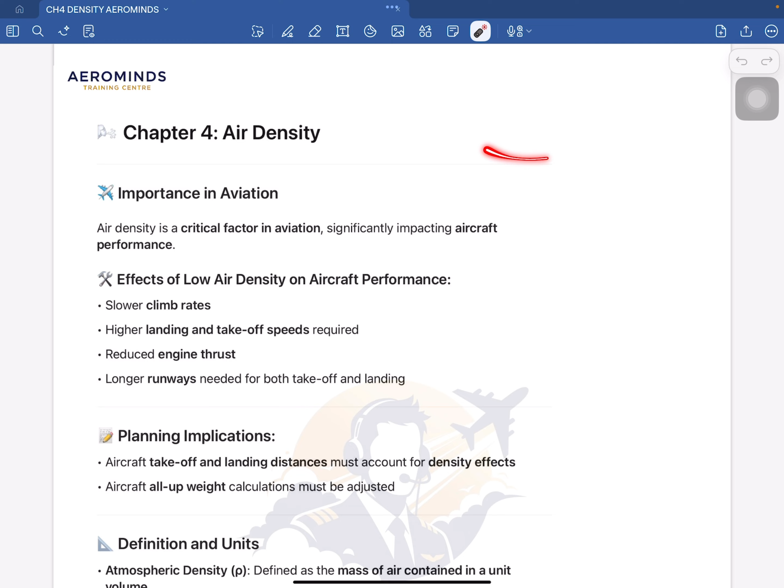Now let us slowly understand the effects of low density air on aircraft performance. First is slower climb rates. Density is denoted by rho. If the air density is low, the air molecules will be less. The wing will produce less lift at the same speed, and the engines produce less thrust because they are breathing less oxygen.

So when the aircraft tries to climb, it feels heavy and somewhat lazy. The climb angle of the aircraft will reduce, and even if you pull the nose up, the aircraft will not climb very well. In exam, remember this logic: lower the density means poorer the climb rate.

Now the second effect is higher landing and takeoff speeds required. This is extremely important because lift depends upon air density, and if the density is low, the wing must move faster through the air to generate the same amount of lift. That means higher TAS will be required for takeoff - TAS is true air speed.

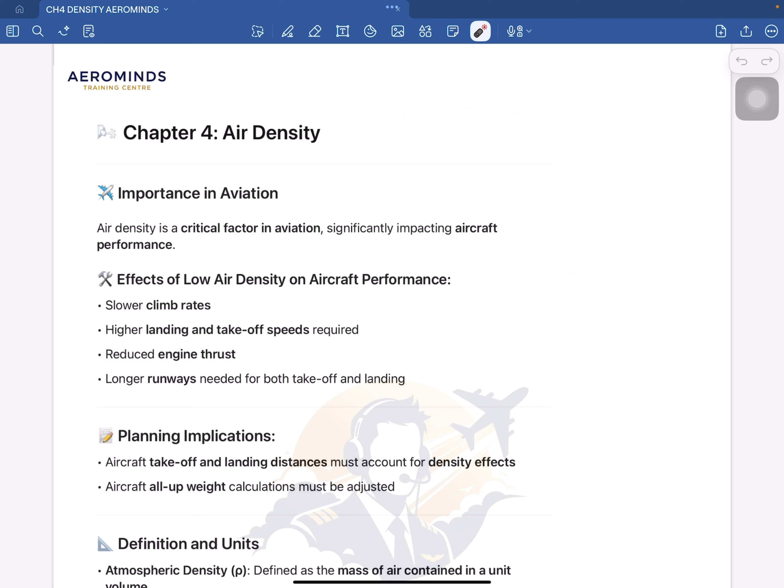So higher TAS will be required for the takeoff roll. Then on landing also, you must approach at a higher speed. Suppose your approach speed is 100, you have to approach at 110 knots. So low density means higher speeds. In DGCA questions, they may ask you indirectly what happens to the takeoff speed when the density reduces - the answer is the takeoff speed increases.

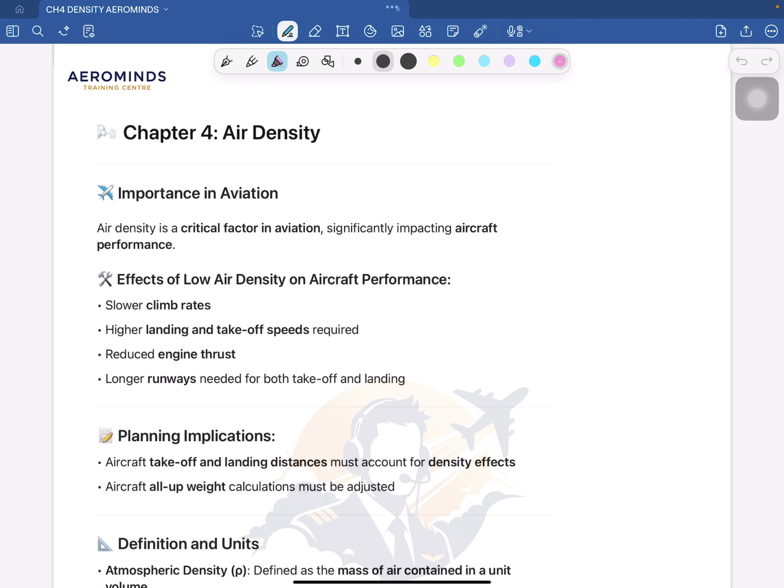Remember this: air density is a critical factor in aviation, significantly impacting aircraft performance. Now, effects of low air density on aircraft performance - first is the slower climb rate, which I told you, the aircraft will not climb much and it will feel lazy. Second is higher landing and takeoff speeds required, and why is it required if someone asks you - because for the same amount of lift, you have to increase your speed. So that is the answer.

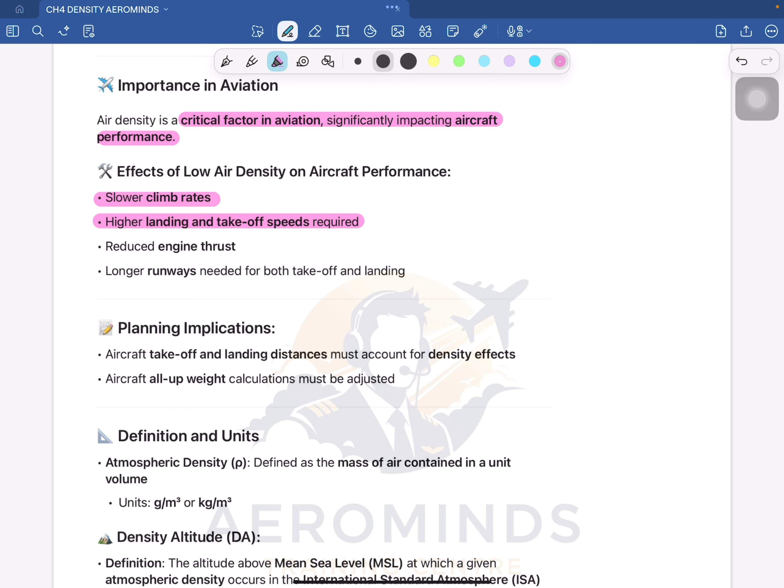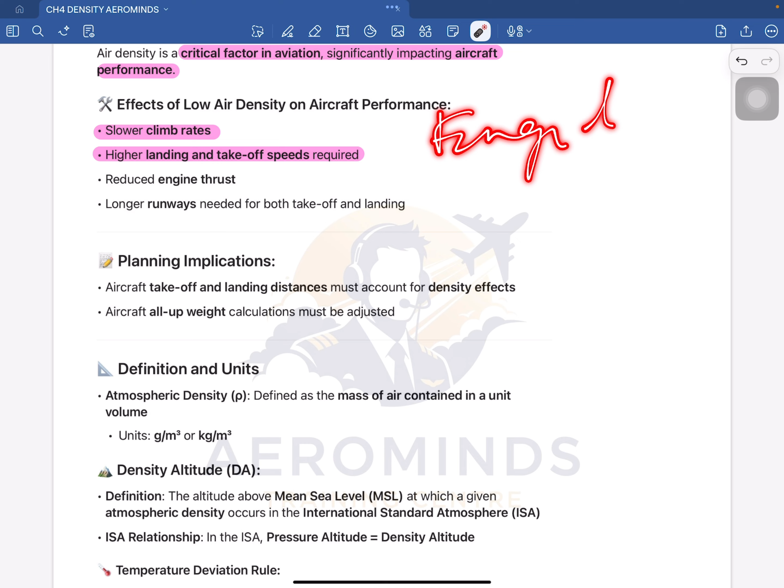Then comes the third one, which is reducing the engine thrust. Now, engines are basically like lungs, they are breathing the air inside. When air density is low, oxygen content per unit volume reduces. Less oxygen means less combustion, and less combustion means less power. This applies to piston engines as well as jet engines, so the engine cannot give its full rated power.

That is so now this is why hot and high airports are performance critical. So we'll see reduced engine thrust. Now, next is longer runways are needed for both takeoff and landing.

Now, why is it so? Combining everything we just discussed, higher speeds are required. Acceleration is slower because thrust is reduced. Because of this, the climb rate will be poor and the stopping distance will increase because your speed was also increased. Now, if the runway is short and density is low, you are basically inviting danger to yourself.

So this is why performance calculations are very mandatory before every flight. Now, before moving to planning implications, we'll mark this quickly: longer runways are needed. Now, if anyone asks you why, so you have the answer - because at low density, at higher airports, engine thrust will be less produced, the climb rate will be less, and landing speed will be more. So you're basically inviting danger.

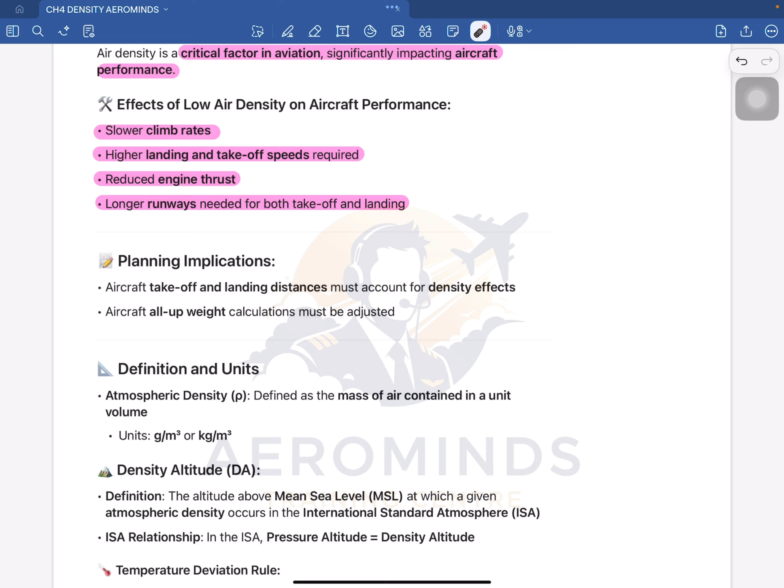Now comes the planning implication. This is where the actual theory meets your actual flying. Aircraft takeoff and landing distance must account for the density effects. You cannot assume the sea level performance at a high hill station, or in summer afternoons with high temperatures. The performance chart already assumes a certain density condition.

Now, as a pilot, you must calculate the density altitude and then check whether the runway length is sufficient or not. Suppose your density altitude is 10,000 feet, and at this, the runway length required for your landing is 2,000 meters, but the runway is only 1,500 meters, so you cannot land at this runway.

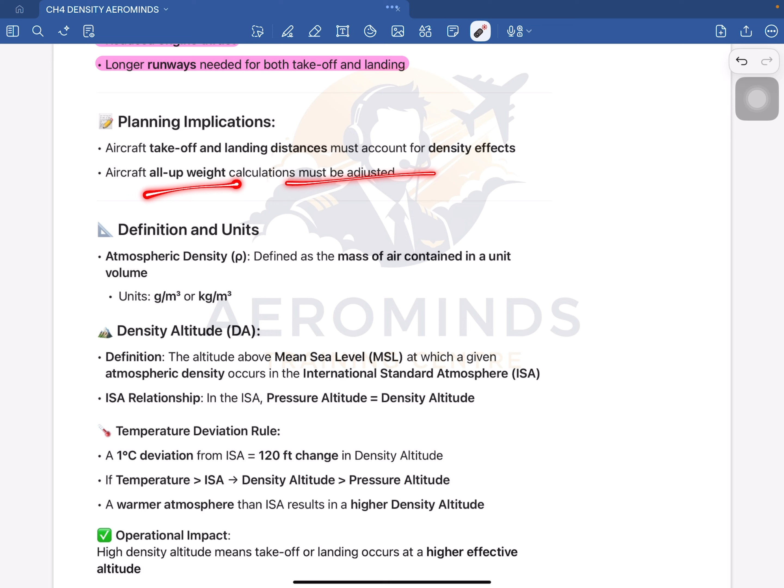Okay, so now next is all up weight calculations must be adjusted. Now if the density is low, you cannot carry full weight. You may need to offload some of the passengers or some of the fuel, or the cargo. This is very common in commercial operations. Weight that is safe in winter mornings may be unsafe in the summer afternoons, you can take it like that. Now DGCA loves asking these questions, which are connecting to the density altitude and the maximum takeoff weight.

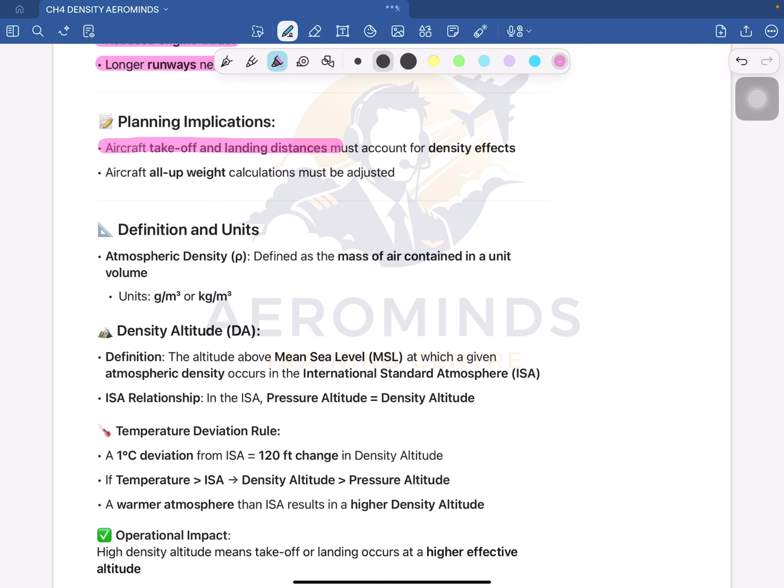So remember this: aircraft takeoff and landing distance must account for density effects. Then aircraft all up weight calculation must be adjusted, it should not exceed. Then comes your definitions and units.

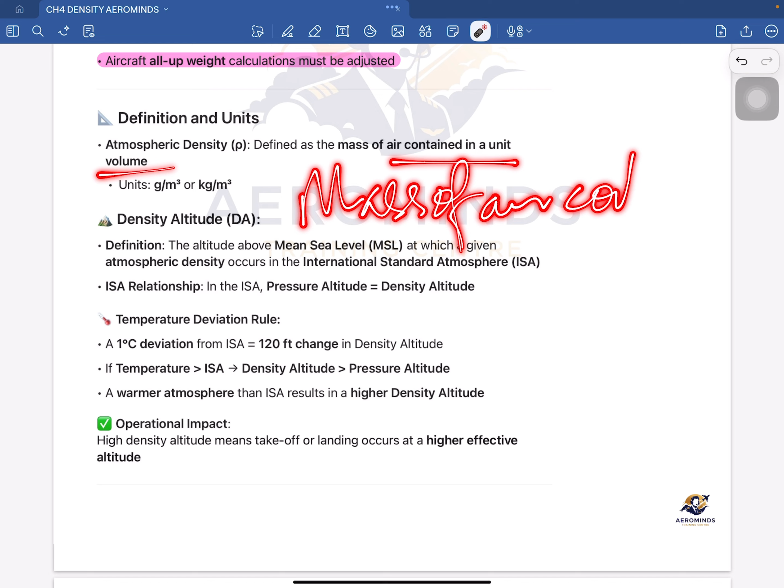So atmospheric density is denoted by the symbol rho, as I told you. It is defined as atmospheric density is the mass of air contained in a unit volume. Remember this.

A very simple meaning of this is how much air weight is present inside a given space. Suppose you have a tiffin box and you have air inside it, not food - how much air is present in that will give you your density of that tiffin. Now, more mass in the same volume means higher density, less mass means lower density. Now the units are gram per meter cube or kilogram per cubic meter. In aviation, we usually use kilograms per cubic meter.

So atmospheric density is defined as rho, denoted as rho, and defined as the mass of air contained in unit volume, and the units are gram per cubic meter or kilogram per cubic meter.

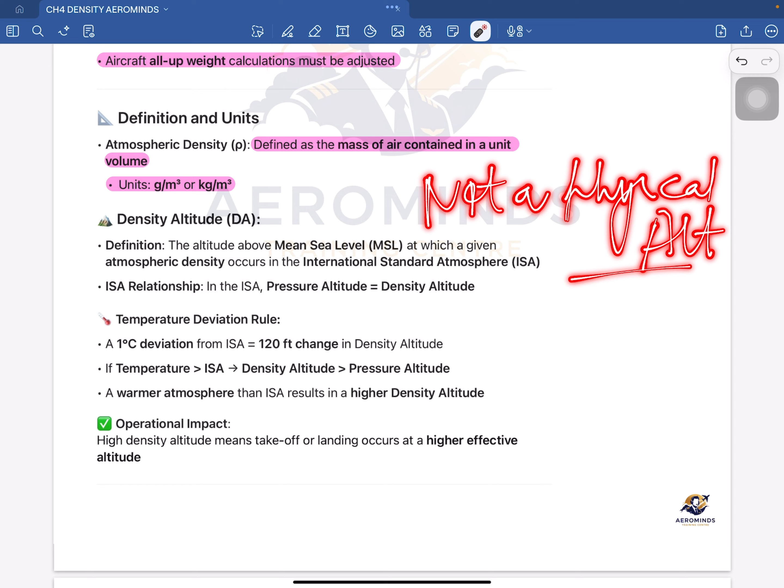Now comes the very important term, which is density altitude. Listen to this carefully. Density altitude is not actually a physical altitude, it is just a performance altitude. Remember this, it is not a physical altitude, it is a performance altitude. Very important. Now, density altitude may be defined as the altitude above the mean sea level at which a given atmospheric density occurs in the international standard atmosphere.

Okay, now if I simplify this, density altitude answers one question: at what height in the ISA, International Standard Atmosphere, would I find the air with the same density as my current air? That is it. Now if you are standing at an airport, suppose at 2000 feet, but the air behaves like air at 5000 feet, then your density altitude will be 5000 feet.

Remember this. The altitude above mean sea level at which a given atmospheric density occurs in the International Standard Atmosphere. Suppose you're standing at 2000 and you feel the air is at 5000, so the density altitude will be 5000. Then comes the ISA relationship.

Aircraft performance cares about the density altitude and not your actual altitude. Suppose your aircraft is standing at an altitude of 1000 feet, but the air it is feeling will be like 6 or 7000 feet, so the density is reduced, and the aircraft performance will be degraded. That is why aircraft need to know what the density altitude is.

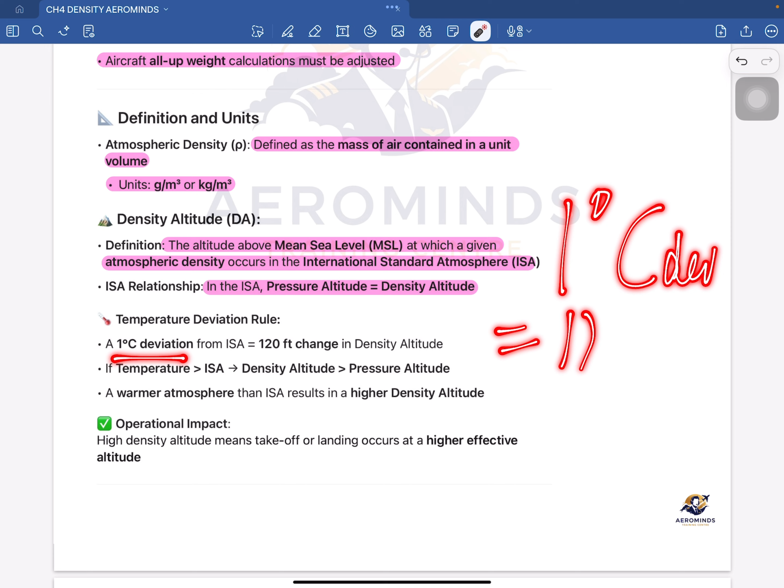Now comes a very favorite exam rule, the temperature deviation rule. A 1 degree Celsius deviation from ISA is equal to a 120 feet change in the density altitude. Remember this: 1 degree Celsius deviation equals 120 feet change in the density altitude. This is the thumb rule, not an exact equation, but DGCA heavily uses it.

Now, if the temperature is higher than ISA, what will happen? The density altitude becomes higher than the pressure altitude if the temperature is more. Why? Because the warmer air will expand. Warmer air expands and cold air contracts, as told in chapter 2, atmospheric pressure. So warm air expands and expanding air is less dense, and less dense air behaves like the air is at a higher altitude. Remember this golden logic: hot air equals high density altitude, and a warmer atmosphere than ISA results in a higher density altitude always, no matter what.

Now the operational impact: high density altitude means takeoff and landing occurs at a higher effective altitude. Even if your altimeter says 2000 feet, the aircraft will feel like it is at 6000 feet. The engines, the wings and propellers, everything behaves according to that 6000 feet. Remember all this.

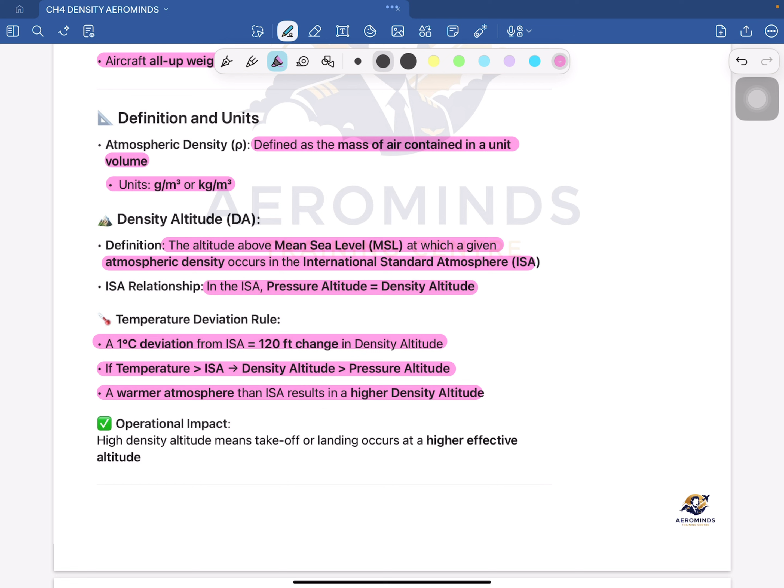The deviation is 1 degree Celsius from ISA equals a 120 feet change in the density altitude. If the temperature is more than ISA, the density altitude will be more than the pressure altitude. So temperature more, more expansion, and the density altitude will rise up. A warmer atmosphere than ISA results in a higher density altitude, same as before. Then comes the operational impact: high density altitude means takeoff and landing occurs at a higher effective altitude.

Now we are moving to density of dry air. PV equals RT. This is where the formula comes, but I'll explain it slowly. The density of dry air is actually calculated using a fundamental gas equation, which is PV equals RT.

Now P is the pressure, V is the volume, R is a constant, and T is the temperature, the absolute temperature. This equation applies to gases, including air.

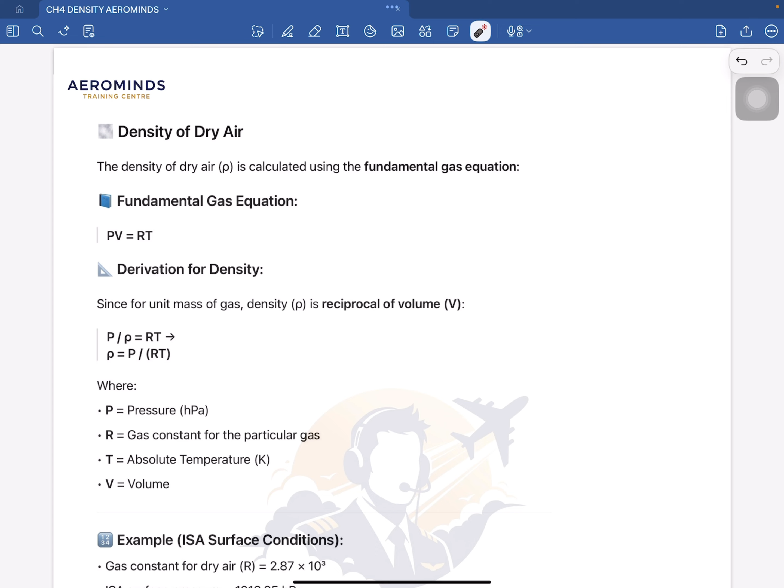Now the derivation for density is mass divided by volume. For unit mass, density becomes the reciprocal of volume. So if we rearrange the equation, P divided by rho equals RT, which gives rho equals P divided by RT. This is a very important exam result: density equals pressure divided by temperature. So if the pressure is increasing, the density is increasing. If the temperature is increasing, the density is decreasing.

Now this explains most of the aviation behavior. Okay, now let us understand the symbols clearly.

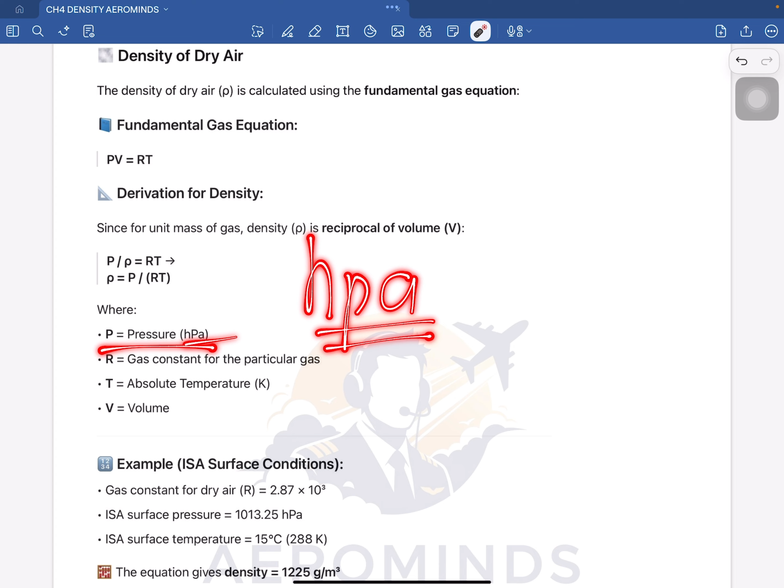So P is pressure and it is measured in hectopascals, HPA. Remember this. And mean sea level pressure is 1013.25 hectopascals. Go, this is it.

Then comes R, which is the gas constant for a particular gas. And for dry air, it will have a fixed value. Now, that is not more important. You just need to know, from the surface level.

Now comes T, which is absolute temperature. So absolute temperature is in Kelvin. K stands for Kelvin, and it is always in Kelvin. It is never in Celsius or Fahrenheit. And V is the volume, as we know.

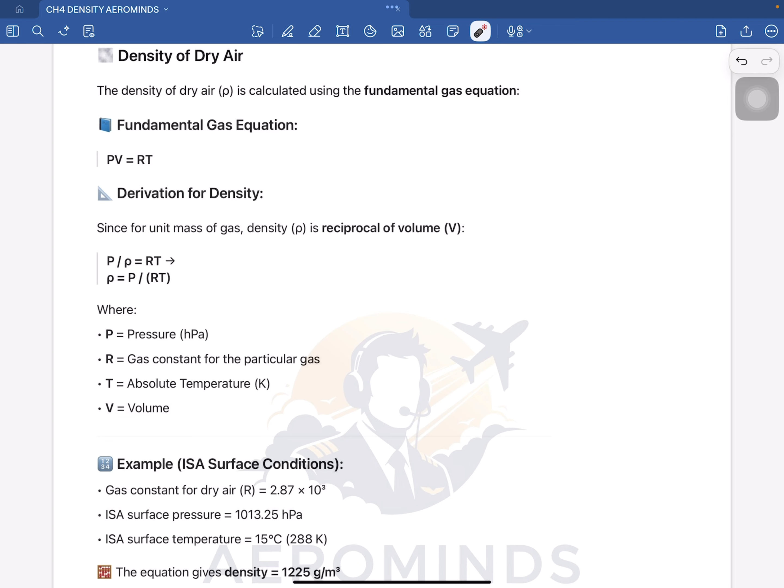Now, if we see an ISA surface condition example, the gas constant for dry air is given as 2.87 multiplied by 10 to the power 3. Now, ISA surface pressure is 1013.25 hectopascals, and ISA temperature is 15 degrees Celsius.

Now, if you want to calculate it, when you put these values into the equation, the density comes out to be 1.225 kilograms per meter cube. And if you want to convert it, that is 1225 grams per meter cube.

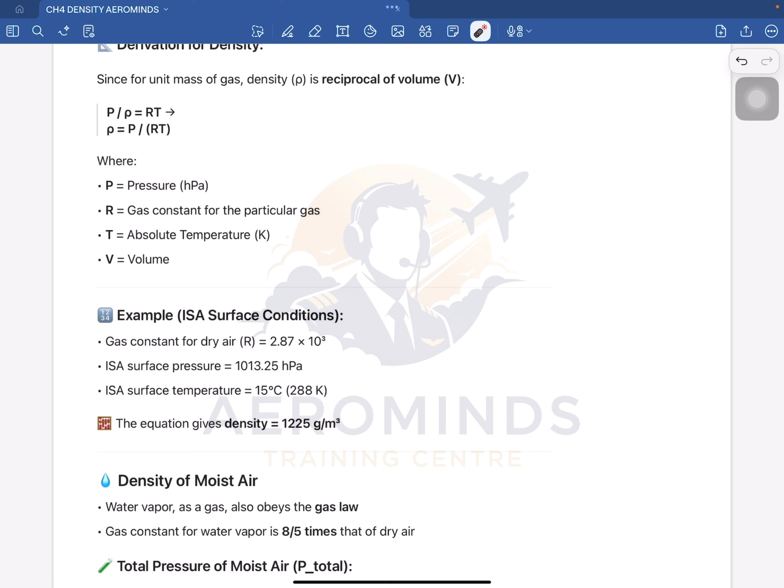Now this value is very important for your exam. DGCA expects you to remember this ISA sea level density value. So by putting these values in the formula, you will get the value for the density.

You guys can put it in this. So rho is equal to P upon RT. Now we'll mark what is important. So the density of dry air is calculated by a fundamental gas equation.

Remember this equation: PV is equal to RT, and the derivation for the density will be this. So rho is equal to P upon RT, where these are the names for the symbols, and then temperature is in Kelvin, then volume.

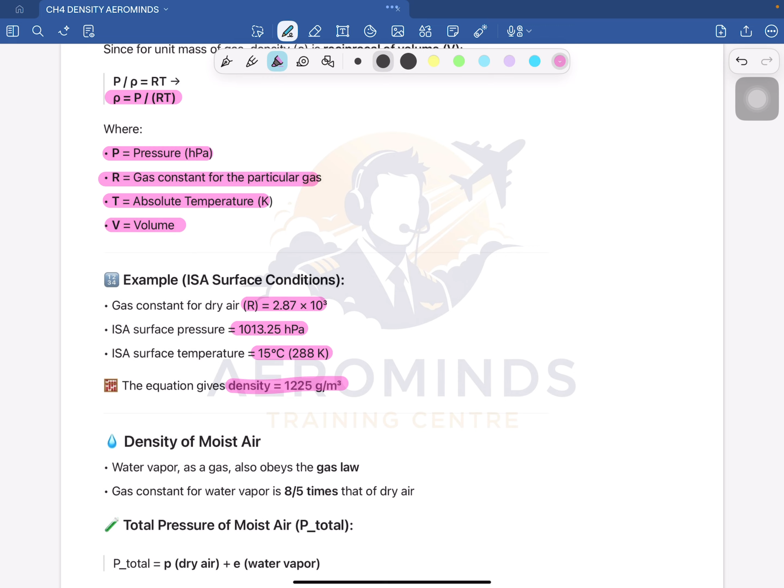Now comes the example. So suppose the gas constant is this, the pressure is given as this, and temperature is this. So you guys can find your density, which is the mean sea level density.

Now we move to the density of moist air. Previously we did this for dry air. Now we come to the moist air. Water vapor is also a gas, if you see. So it also obeys the gas law.

Now the gas constant for water vapor is 8 by 5 times that of dry air. That means water vapor behaves somewhat differently from the dry air. Now total pressure of the moist air, pressure total, equals the pressure of dry air plus the pressure of water vapor. So the total pressure equals P plus E, where E is the vapor pressure, water vapor pressure, and P is the dry air pressure.

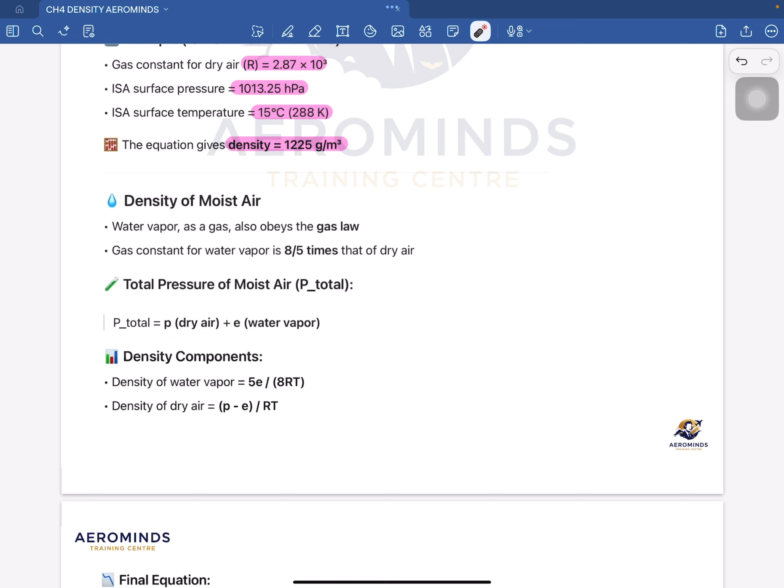Okay, now comes the density components. So density of water vapor equals 5E divided by 8RT. And density of dry air equals P minus E divided by RT. And when we combine these both, we'll get density of the moist air equals P minus 3E divided by 8, divided by RT.

Okay, now here comes the key takeaway, which is important, remember this: moist air is less dense than dry air under similar conditions. Many students think that humid air is heavy, and that is completely wrong in aviation physics, because water vapor molecules are lighter than oxygen and nitrogen, which combine for 99% of the atmosphere.

Now when water vapor replaces dry air, overall density will decrease. Now humidity's effect on density is small and often ignored in general aviation, but DGCA can test your knowledge with this. So remember,

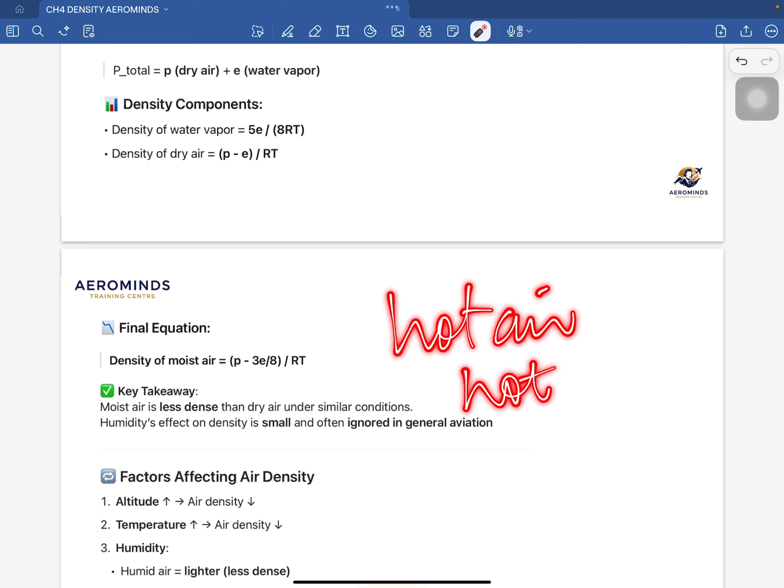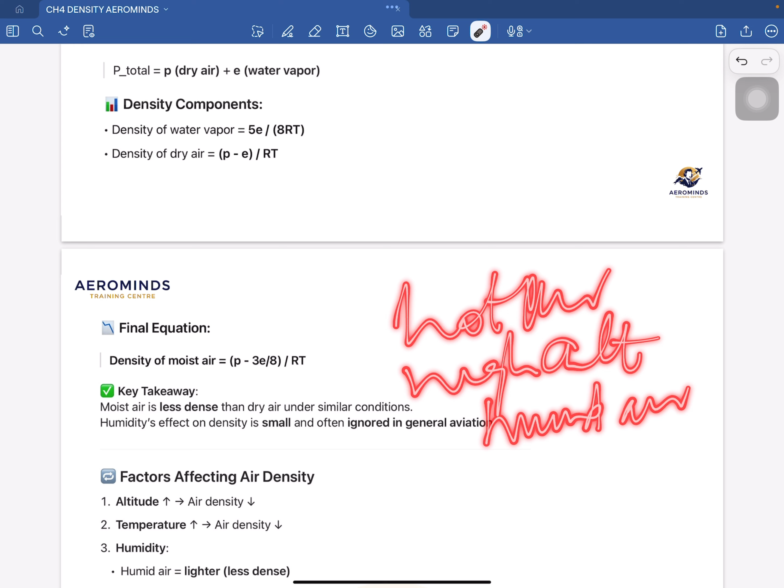hot air, high altitude, and humid air, all these reduce the density. Okay, hot air, high altitude, and humid air, these reduce the density. Okay, and reduced density means lower will be your aircraft's performance. So that is it for this

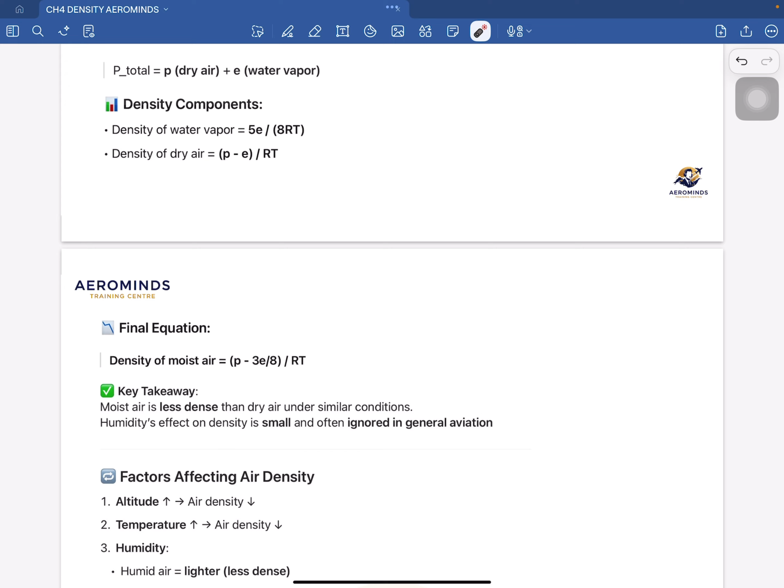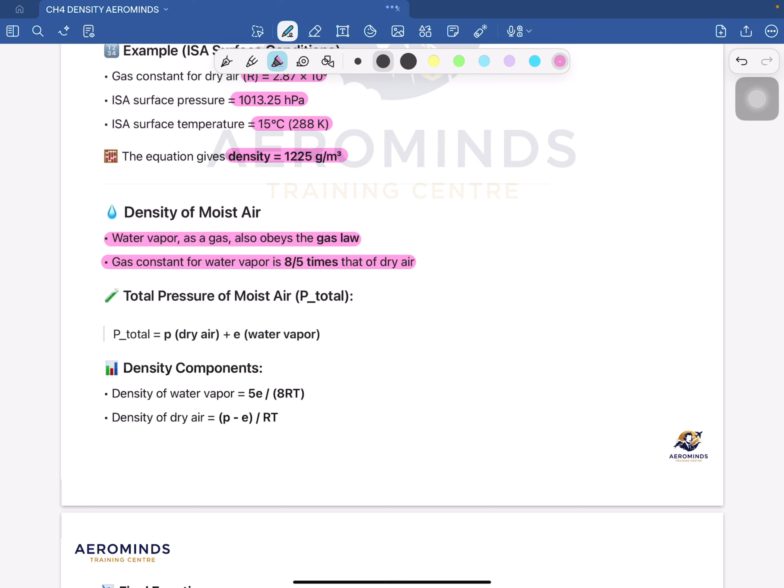equation. So density of moist air: water vapor as a gas also obeys the gas law, and gas constant for water vapor is 8 upon 5 times that of dry air. Now comes the total pressure for moist air, which is P plus E, dry air plus water vapor. Then comes the density components, and then comes the final equation. Remember the final equation for your exam. Then comes the takeaway, which is moist air is less dense than the dry air under similar conditions.

Now, the humidity's effect on density is small, and it is often ignored in aviation. But you can still be asked about it in your exam.

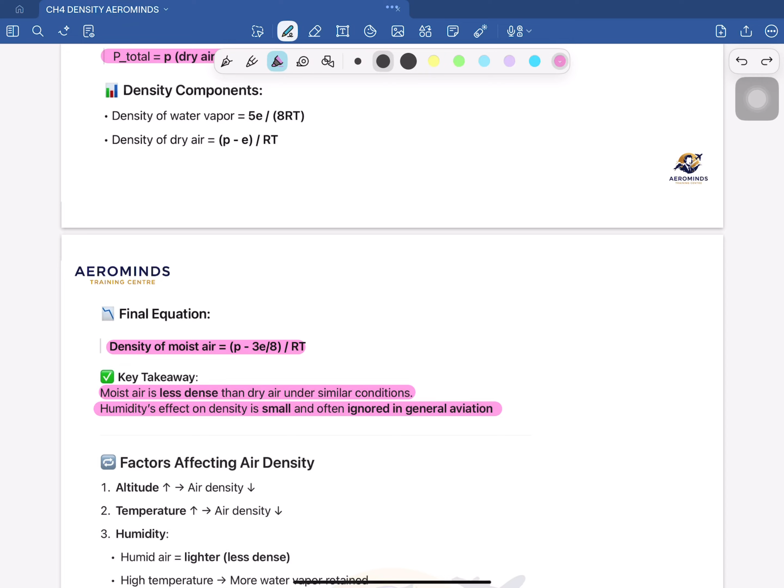Now we'll move ahead and talk about the factors affecting density. Air density does not always remain constant, it keeps changing. It changes with height, with temperature, and with moisture in the air. If you understand all these three, you'll understand almost the entire chapter.

So the first factor is altitude. As altitude increases, air density decreases. I hope you know this, but let me explain it again.

Near the surface of the earth, air is pressed down due to the static pressure, by the weight of the air above it. So the air is tightly squeezed near the surface.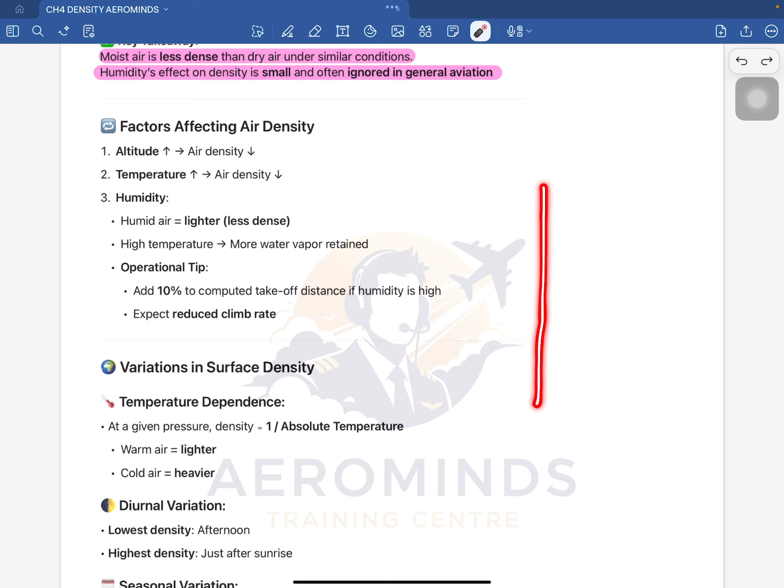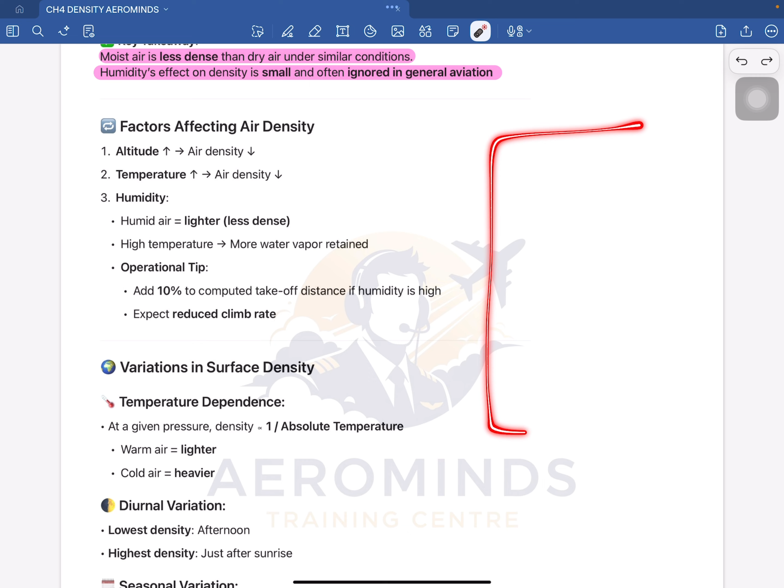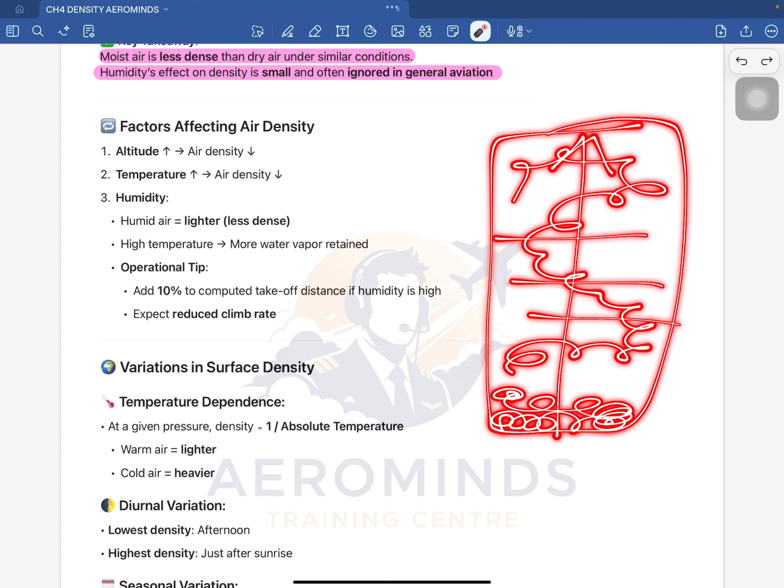Now, whenever you go higher, what happens? The air becomes more spread out, meaning fewer air molecules are in the same space. If you imagine this column and you're flying from here to here, the density here will be like this, but as you move upward, it becomes very less. So, fewer molecules mean less density.

So very simply put, higher altitude means thinner air. And thinner air means lower density, and lower density means poorer aircraft performance. So remember the explanation and the point: altitude increases, density decreases, and now you know why this happens.

So when you find this question in your MCQs, do tick that air density will decrease with increase in altitude. Next comes temperature: as temperature increases, air density decreases. Why does this happen?

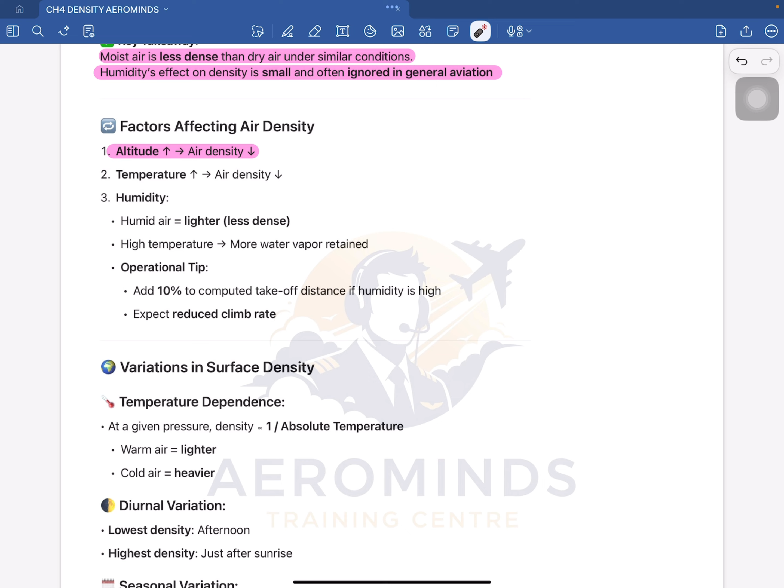When air is heated, the molecules start moving faster, and when they move faster, they move away from each other. This increases the volume of the parcel, but it's the same amount of air, and the larger the volume, your density will reduce.

So, temperature increases, density will reduce. Remember this. The warm air is lighter as compared to cold air. This is why early morning flights perform better than afternoon flights, especially in the summer.

So if you are also flying on your own, if you see your takeoffs or your climb performance in the winters, or in wintry mornings, as compared to hot summer afternoons, your winter climb will be better than your summer climbs. Now the third factor is humidity.

Humidity basically means the moisture content, the water vapor present in the air. So humid air is lighter, which means it is less dense. Humid air is lighter, which means it is less dense.

Now, this sounds confusing at first because many people think moisture means heavy air. But in physics, the water vapor molecules are lighter than oxygen and nitrogen molecules. Water vapor replaces the dry air, which overall reduces the density.

I told you this previously also. Now comes another important topic: high temperature allows air to retain more water vapor. Warm air can hold more moisture. So hot and humid conditions are the worst combination for aircraft performance, especially climb.

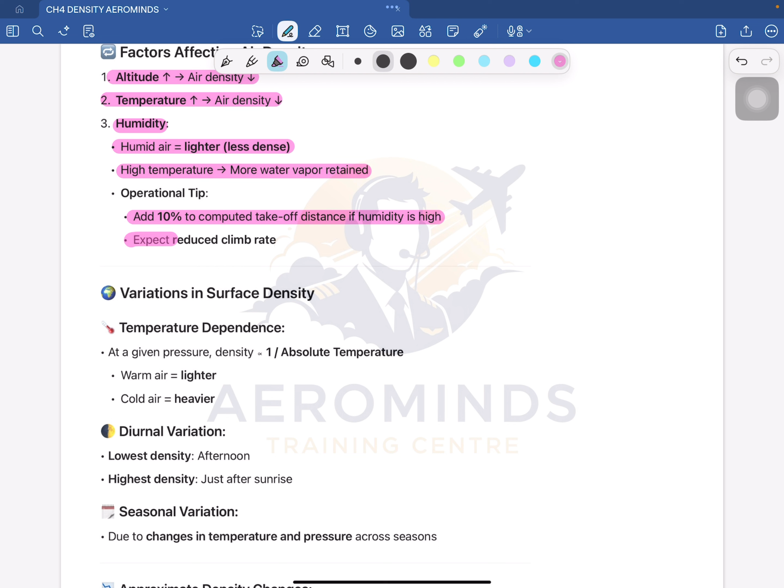Then, higher temperature means more water vapor can be retained. Got it? And then comes the operational tip: add 10% to the computed takeoff distance if humidity is high, and expect a reduced climb rate. So when humidity increases, the density will reduce.

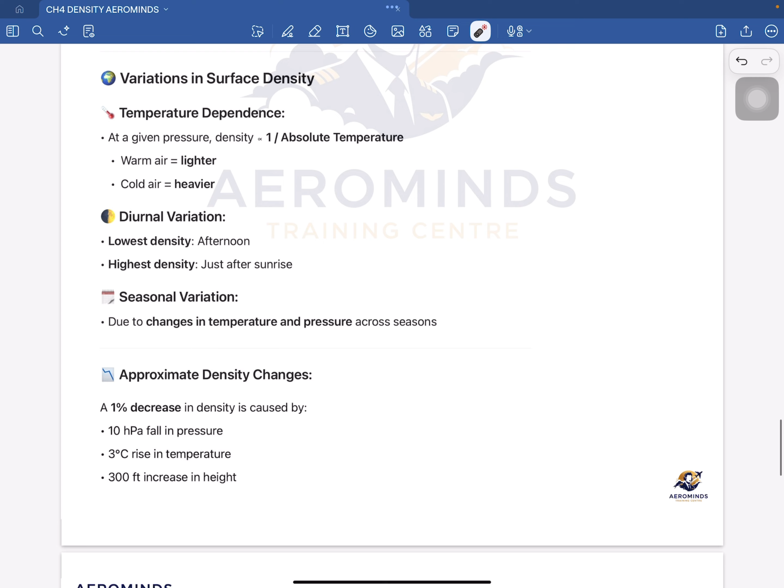Then comes variations in the surface density. Now, surface density basically means the air density which is near the ground, as the name suggests, near the surface.

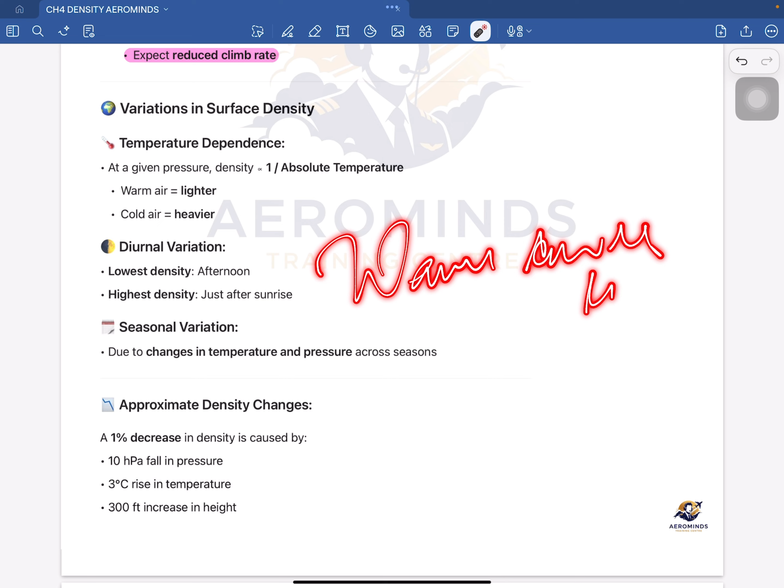First is the temperature dependence. At a given pressure, density will be inversely proportional to the absolute temperature. So density varies as 1 divided by temperature in Kelvin. If the temperature goes up, the density will go down, and if the temperature goes down, the density will go up. The warmer air is lighter and cold air is heavier. Remember this.

Now we'll talk about the diurnal variation. Diurnal basically means daily variation. Lowest density is in the afternoon and highest density is just after sunrise. Why is it lowest in the afternoon? Because the ground heats up during the day, the temperature rises, heating the air near the surface. Why is it highest after sunrise? Because during the night the earth allows some cooling and the cold air settles near the surface, which makes it very dense. This is why performance charts often assume early morning conditions for the best performance.

Now comes the seasonal variation. Density changes across seasons due to changes in temperature and pressure, which change every season. In winter, the air is colder and denser, and in summer the air is warmer and less dense. The pressure pattern also changes with seasons, which affects the density further.

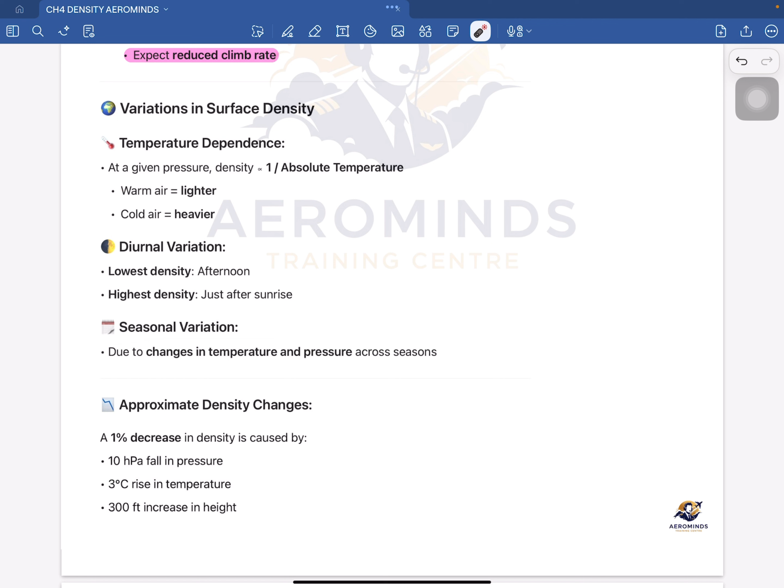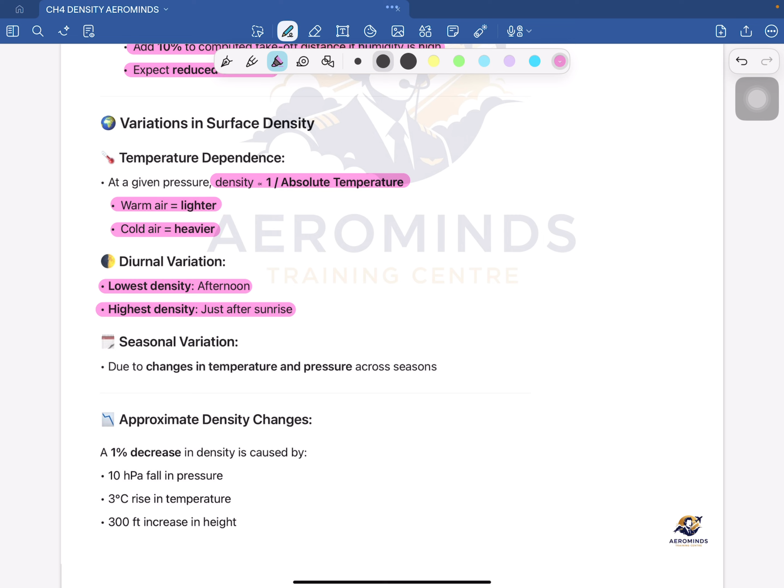So let's mark what we saw. At a given pressure, density is inversely proportional to temperature, so warmer air is lighter and colder air is heavier. Then comes the diurnal variation: lowest density is in the afternoon, highest density is just after sunrise. Remember both of these, it is also for your CPL training. Then comes seasonal variation: due to changes in temperature and pressure across seasons, the density changes.

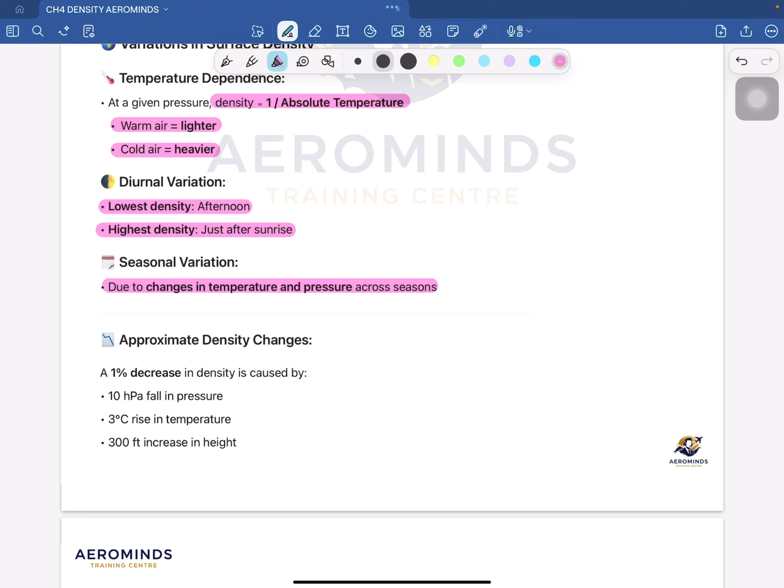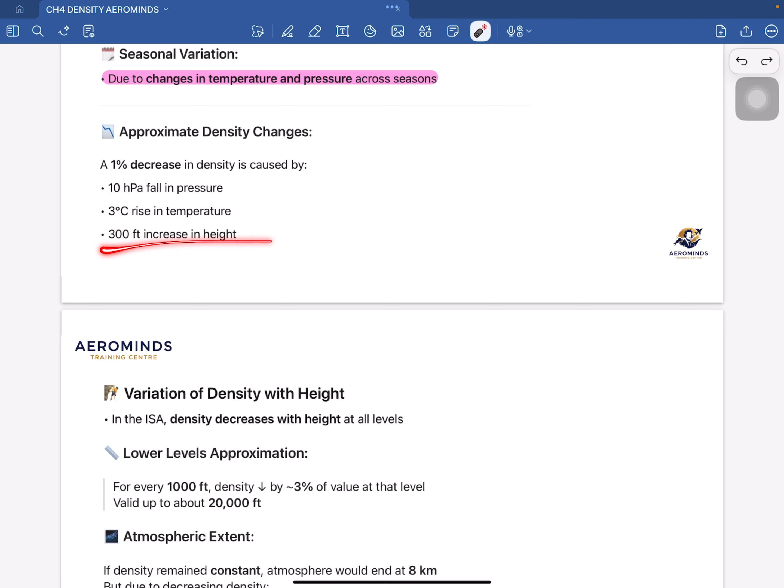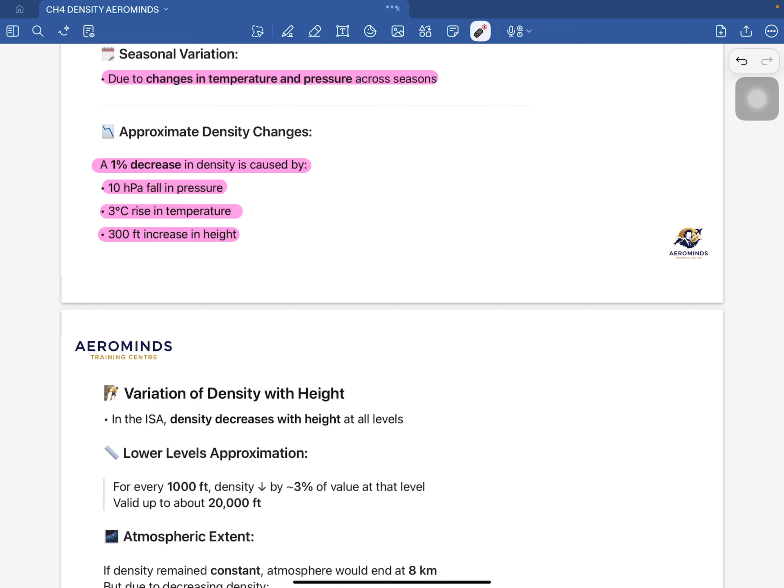Now let us look at the approximate density values. A 1% decrease in density is caused by one of the following: a 10 hectopascal fall in pressure, or a 3-degree rise in temperature, or a 300-foot increase in height. This is not exact physics, these are rule of thumb values used for quick estimations. DGCA may ask these directly or indirectly in your MCQs, so remember: height increases, density decreases; pressure decreases, density decreases; and temperature increases, density decreases.

For a lower level approximation, for every 1000 feet increase in height, density decreases by about 3% of its value. This approximation is valid up to about 20,000 feet only, and beyond that the rate changes, and this simple rule becomes inaccurate.

Now comes the atmospheric extent, a very interesting concept. First we'll mark this: variation of density with height - density decreases with height at all levels. Lower level approximation is that up to 20,000 feet, for every 1,000 feet, there will be a decrease in density by a value of 3%, valid up to only 20,000 feet.

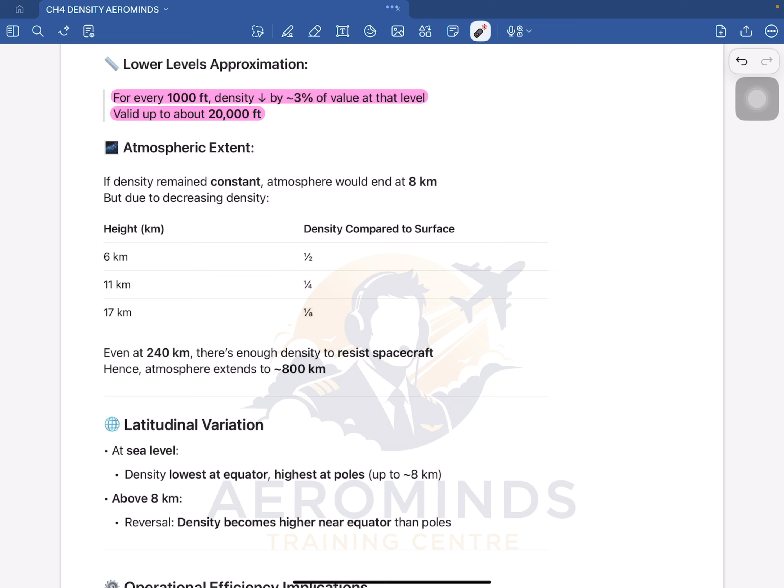That is why satellites slowly lose their speed and need correction burns. So we say the atmosphere extends up to 800 kilometers, not because the air is dense there, but because air molecules are still existing there. Remember these values.

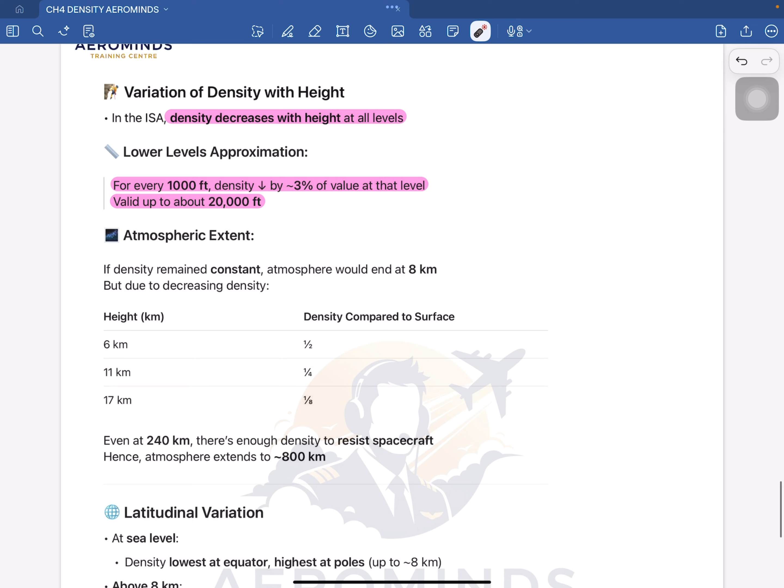If the density remained constant, the atmosphere would end at around 8 kilometers only, not extend up to 800. At 6 kilometers, density becomes half. At 11 kilometers, one fourth. At 17 kilometers, it becomes one eighth. Remember this. And even at 240 kilometers, there is enough density to resist the spacecraft.

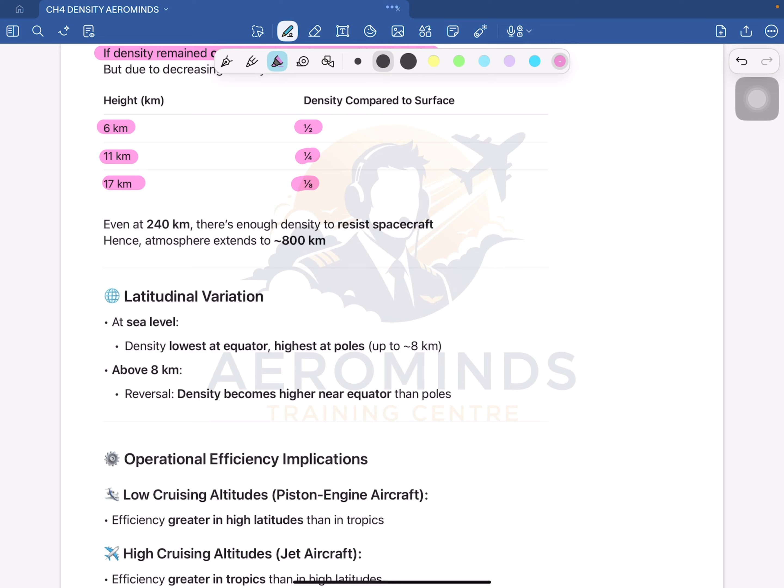Then comes the latitudinal variation. Latitude basically means the distance from the equator towards the pole. So this is the equator, this is the pole, and this is the surface of the earth. As we go from here to here, the latitude increases, so latitudinal variation.

At sea level the density will be lowest at the equator and highest at the poles, up to about 8 kilometers only. Remember this. Density lowest at equator, highest at poles, at sea level only, up to 8 kilometers. Why? Because the equator is hotter, and hot air expands and becomes less dense. The poles are cold, so the air is denser.

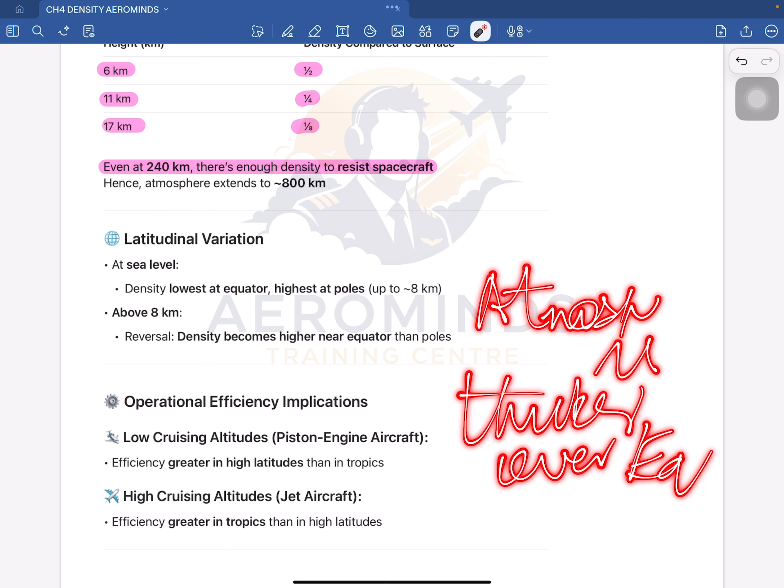Above 8 kilometers something interesting happens: there is a reversal. Density becomes higher near the equator than near the poles. This happens because the atmosphere is thicker over the equator, due to expansion and heating. So at higher altitude there is more air over the equator compared to the poles.

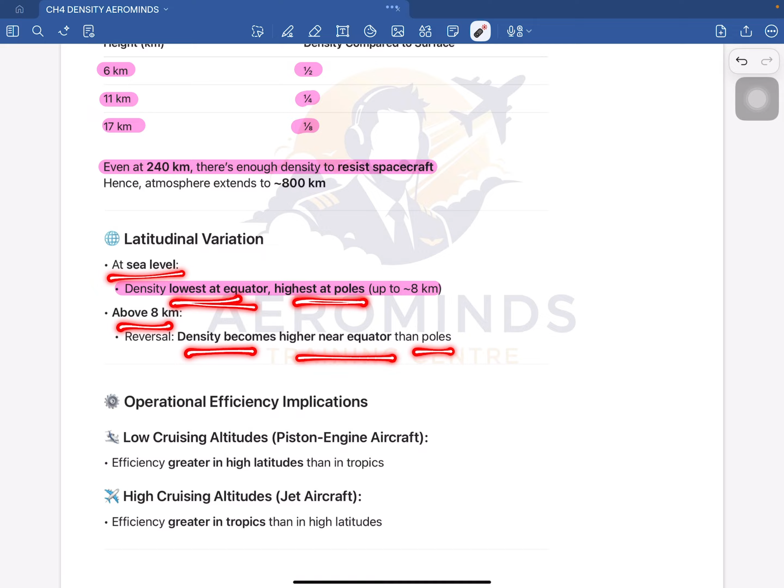Now that is it for this. So density is lowest at equator, highest at poles. Remember, at sea level lowest at equator, highest at poles, due to the temperature. But after 8 kilometers, the density becomes higher near the equator than the poles. Remember this. It is slightly confusing, but you have to memorize it, and eventually you'll learn it.

Then comes the last topic, the operational efficiency implications. This is where the density theory connects directly to your aircraft type, whether you're flying a piston engine or a jet engine.

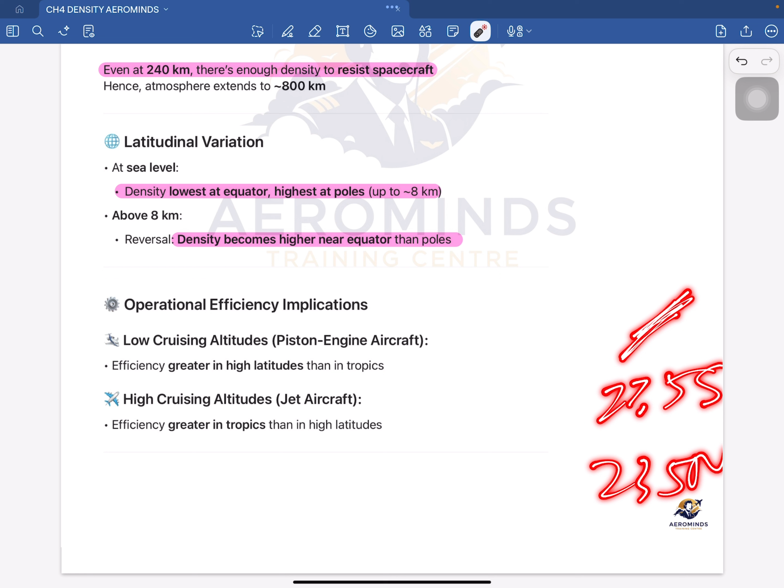For low cruising altitudes like piston engine aircraft, efficiency is greater in high latitudes than in the tropics. The tropics are roughly 23.5 north to 23.5 south. Why? Because the air is denser, the engines are able to breathe more, they can perform better, and the wings produce more lift because the density is more.

For high cruising altitudes, like jet aircraft, efficiency is greater in the tropics than in high latitudes. Why? Because the tropopause is higher there, the air structure is different, and jets can cruise more efficiently at higher true altitudes.

Always remember, density is not just about weather; it also affects your route planning, your aircraft selection, whether you fly a piston or a jet, and your payload decisions - how much weight, passengers, and cargo you can carry. It also affects your safety margins, which is very important when flying with 200 passengers behind you.

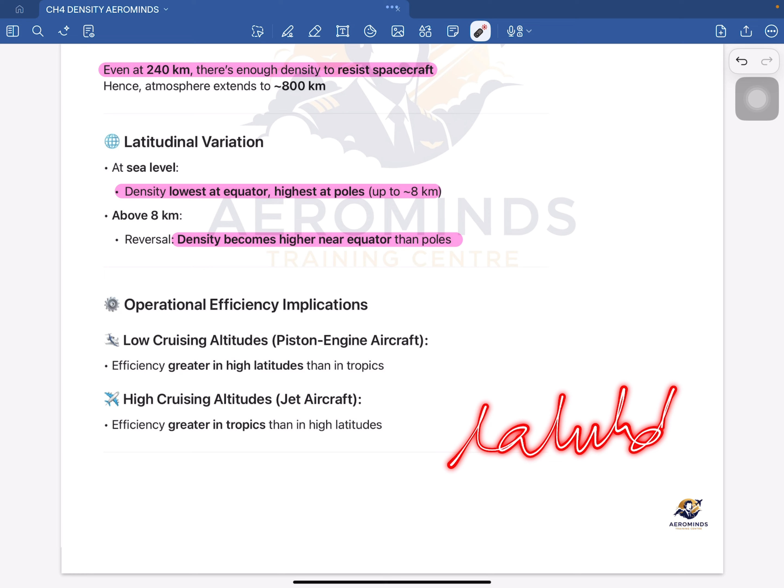If you understand how density changes with altitude, temperature, humidity, and diurnal activity - whether you're checking within the day or the night - plus the season, and the latitude as we saw, moreover the denser areas being the poles, that is what makes you think like a professional pilot, not just a student preparing for an exam. We'll use these ideas again when we study performance, takeoff charts, and so on.

So that is it for this. We'll quickly mark this and move to the MCQs.

For low cruising altitudes, efficiency is greater in high latitudes than in tropics. For high cruising altitudes, which are jet aircraft, efficiency is greater in tropics than in high latitudes. That is it, now we'll move to the MCQs.

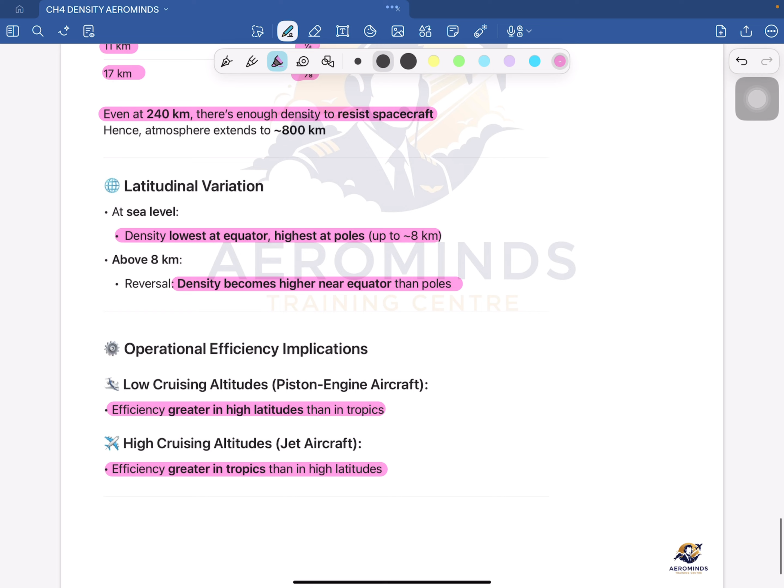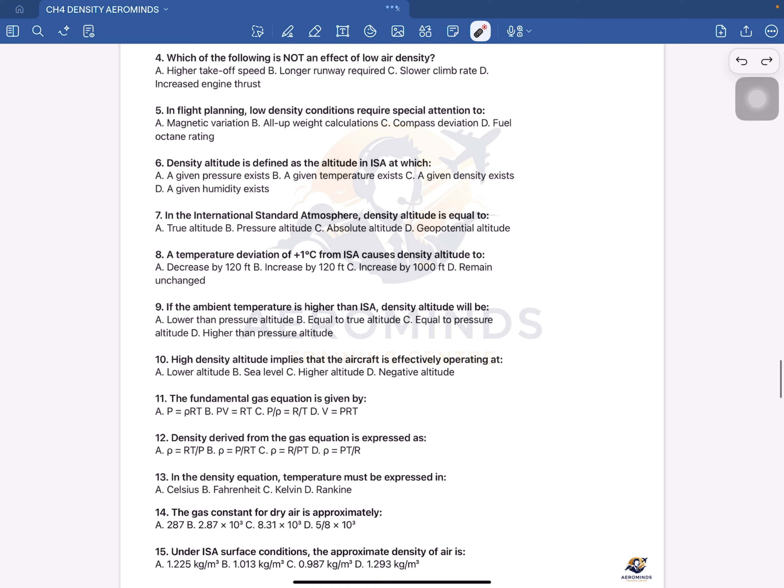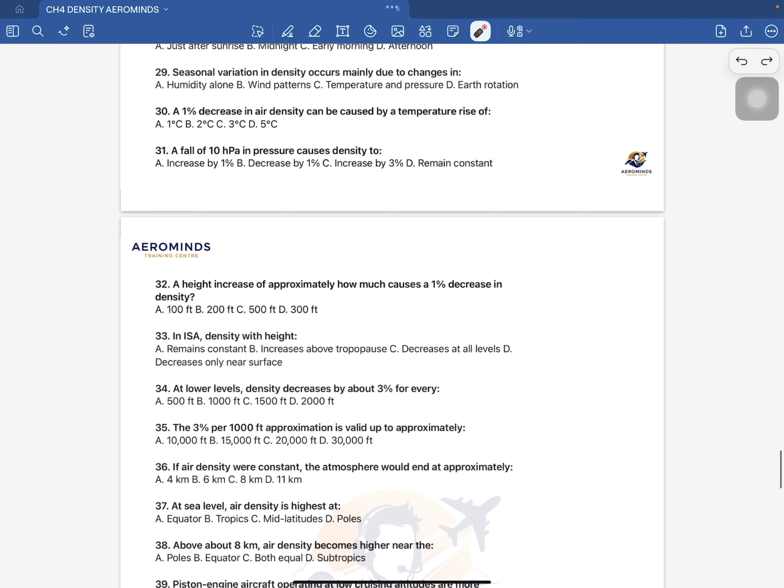So, these are the MCQs. You can do them all. Remember, read each and every question twice and check all the options first, then only mark your answers. Because what students tell me after doing these questions is that they aren't getting the answer, but if they do it again in front of me, they get the right answer, which means they aren't reading it correctly.

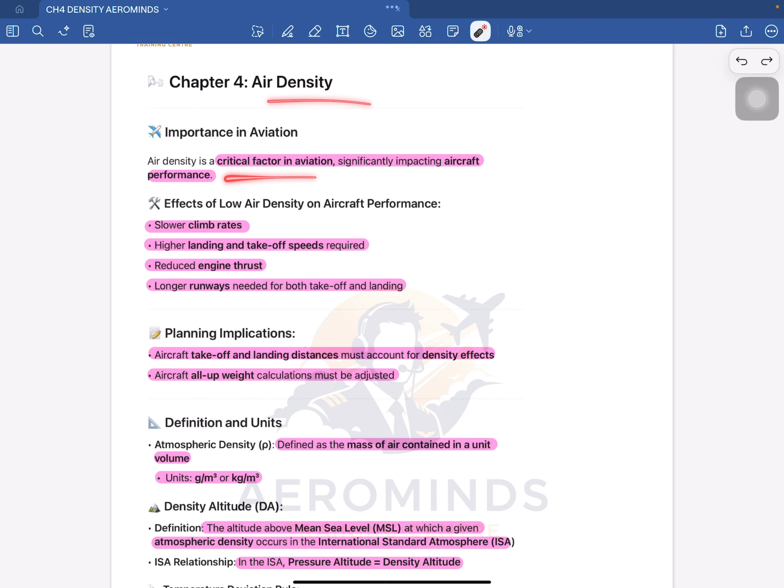So that is it for this chapter. We'll quickly revise what we have studied, taking 2 minutes for revision. Why is air density required? Because it is a critical factor which affects aircraft performance - slower climb rates, takeoff and landing distances, and engine thrust are reduced, longer takeoff runs are required when density is low. So takeoff and landing distances are changed, and all up weight calculations have to be adjusted, because if the runway is shorter and the aircraft is heavier on a sunny summer afternoon, you cannot take off.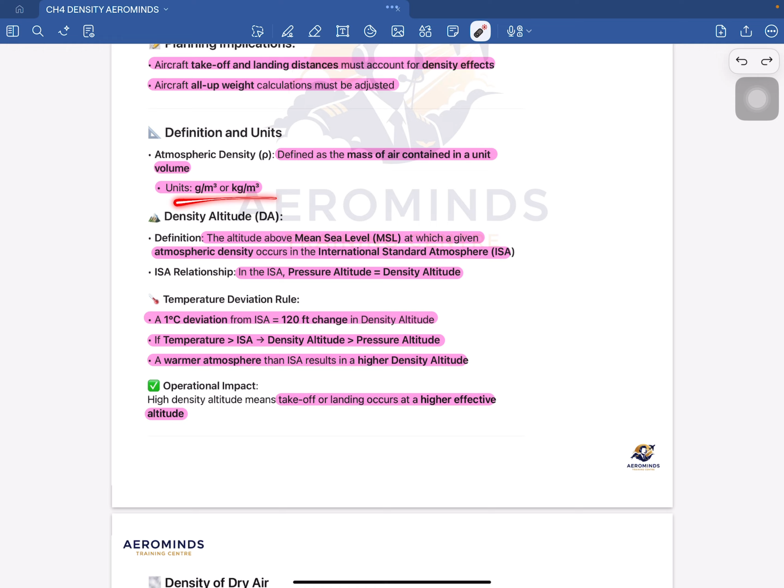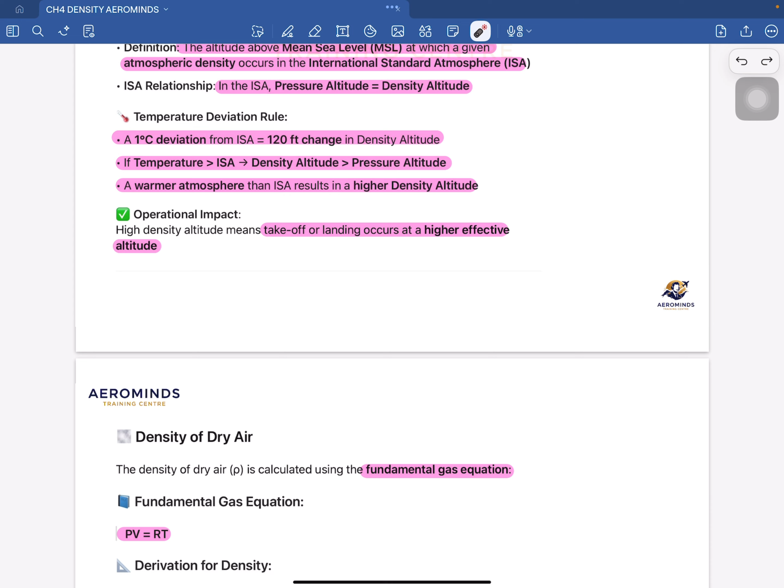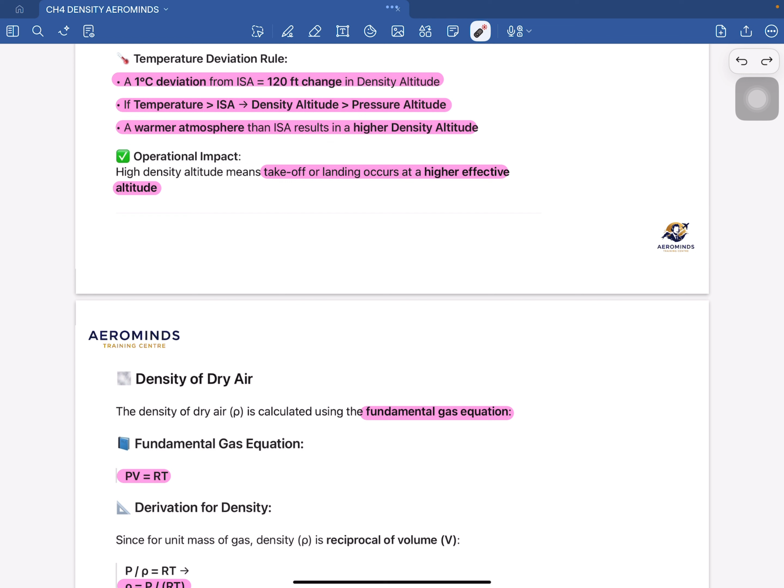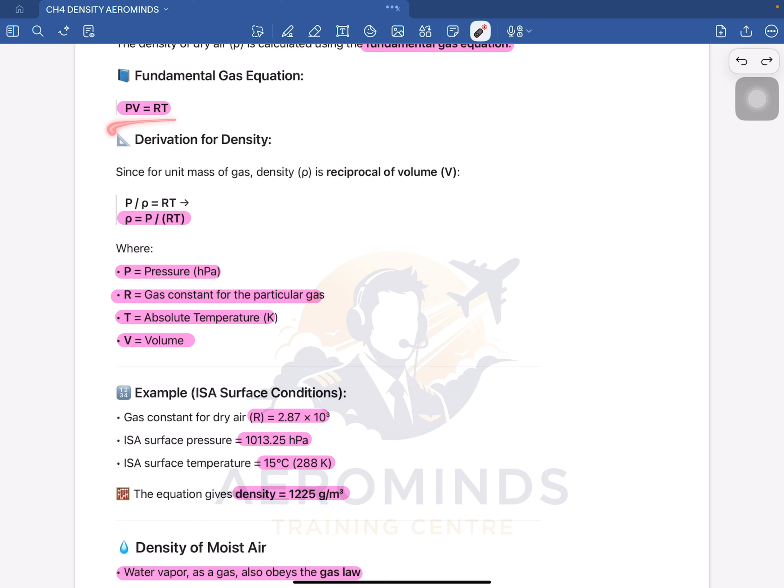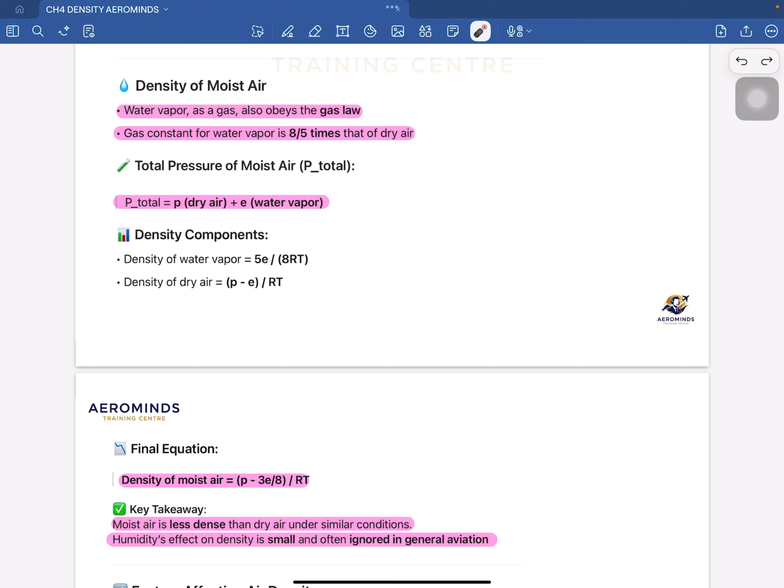Then comes the density of dry air. The fundamental gas equation comes - for dry air, it is this. These are the names, then comes the values, and you can find the answer on your own. Then comes the density of moist air, which obeys the gas law, and is 8/5 times that of dry air. Then comes the total pressure of moist air, P plus E.

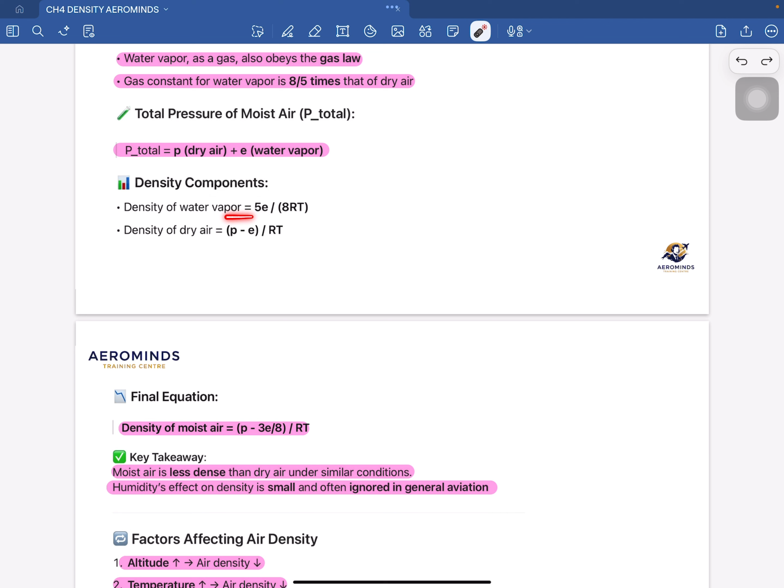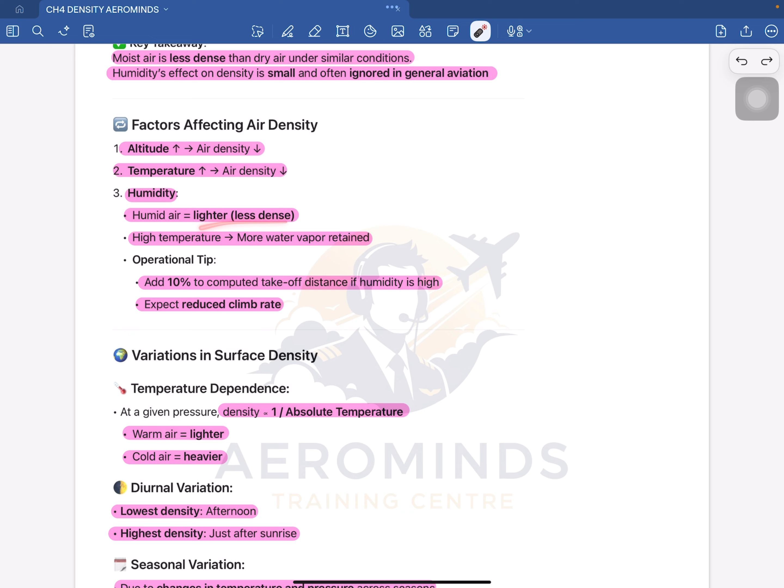Then comes the density components - these are the values for density of water vapor and dry air. Then comes the final equation, which is the combination and the key takeaway. Then comes the factors: as altitude increases, density reduces; temperature increases, density reduces; humidity increases, density reduces. So if humidity is high, you have to increase your takeoff distance by 10% and expect a reduced climb rate. Then comes the variation in surface density.

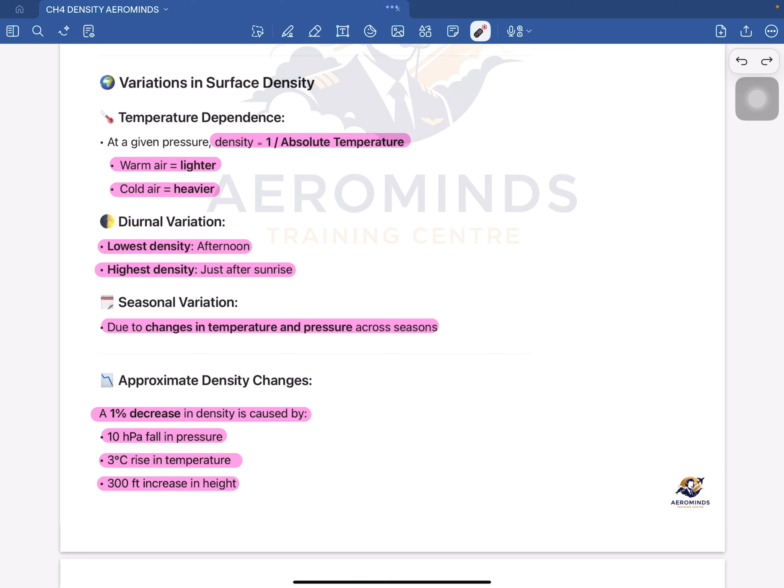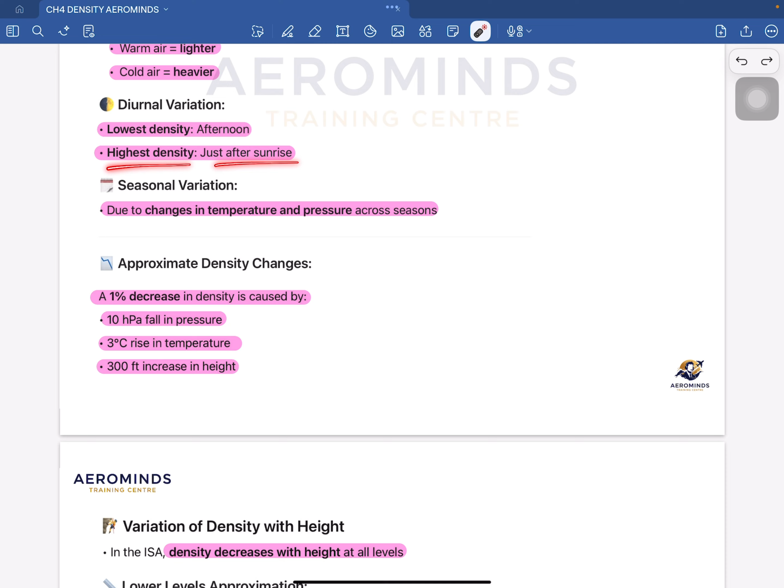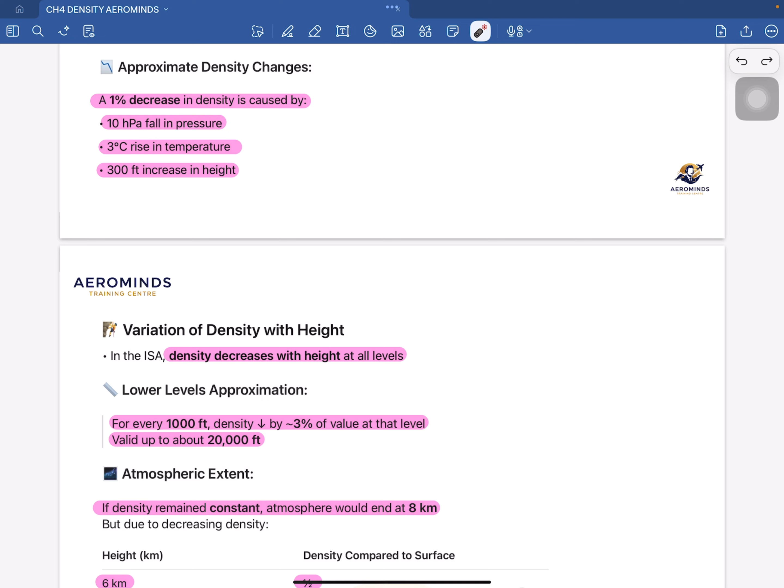The temperature dependence - density is inversely proportional to temperature in Kelvin. So warmer the air, lighter the density; colder the air, heavier the density. Then comes diurnal variation - lowest density is in the afternoon, highest density is just after sunrise. Then comes seasonal variation - due to changes in season, there is change in temperature and pressure. Then comes the approximate density change values - a 1% decrease in density is caused by these values.

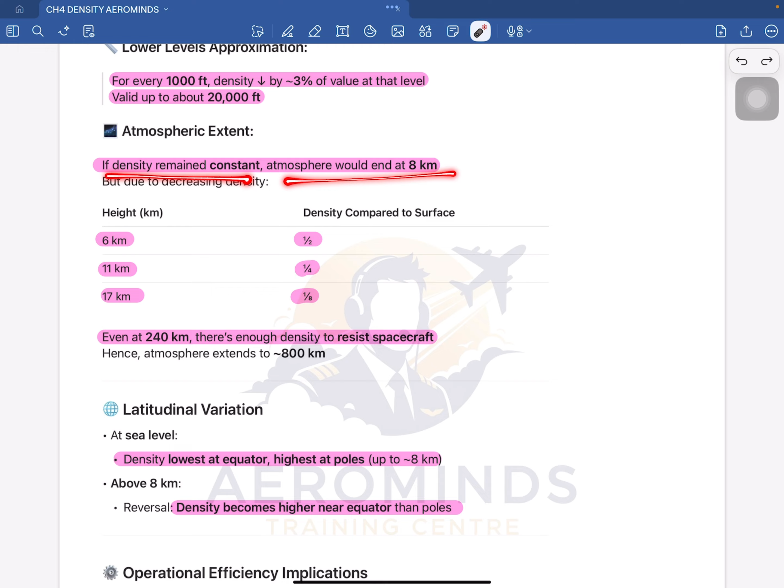Then comes the variation of density with height - density decreases with height at all levels. There is a chart you can see. For every 1,000 feet, density reduces by 3% of the value at that level, and this is valid only up to 20,000 feet. Then comes atmospheric extent - if density remains constant, the atmosphere will end at 8 kilometers. These are the significant corresponding values according to height in kilometers - 6 kilometers, 11, 17, half here, one fourth, and then one eighth. Now, even at 240 kilometers, there is enough density to resist spacecraft.

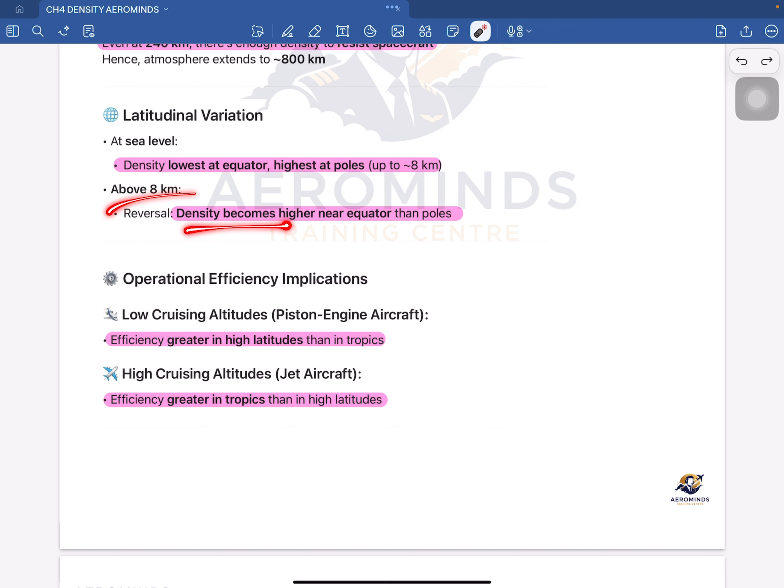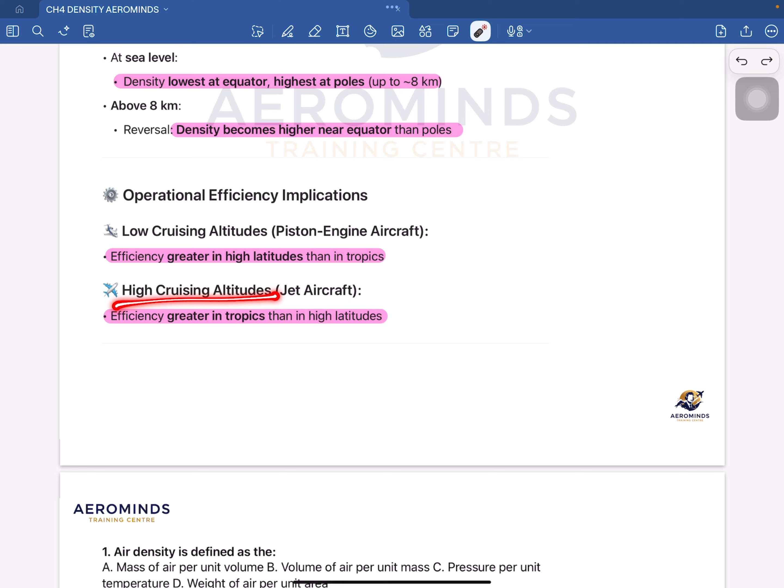Then remember the latitudinal variation - at sea level, density is lower at the equator and highest at the poles, but only up to 8 kilometers. After 8 kilometers, the density becomes higher at the equator compared to the poles. Then comes operational efficiency implications - low cruising altitudes, basically used by piston engine aircraft, have efficiency greater in high latitudes than in tropics. Then high cruising altitudes have efficiency greater in tropics than in high latitudes. So what is the reason? This is the reason - latitudinal variation.